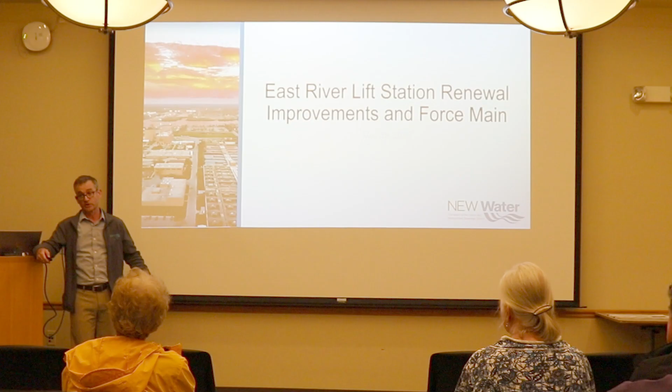Thank you for joining us at our public information meeting for the East River Lift Station Renewal Improvements and Force Main project. This is a project really important to New Water. I'm going to give you some background about who New Water is, for those of you unfamiliar, and then turn it over to people closer to the project who know more of the details. I'll do some introductions, give background on New Water, project overview, closing, and then we'll be around for questions about your property or what the construction activity might look like.

My name is Nathan Qualls, executive director at New Water. We have Lisa Saru and Max McGuire from our staff. Max is new to the organization. Lisa's been with New Water 11 years. I've been there about 16 years, it'll be 17 this year. We also have folks from Donohue and Associates who help us with the planning and design work for the project, and they'll give you some background on the project as well.

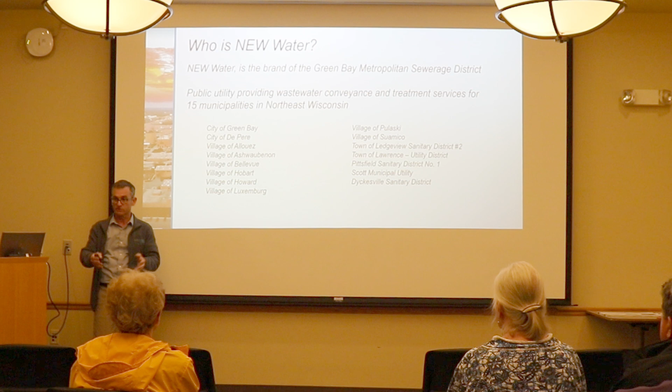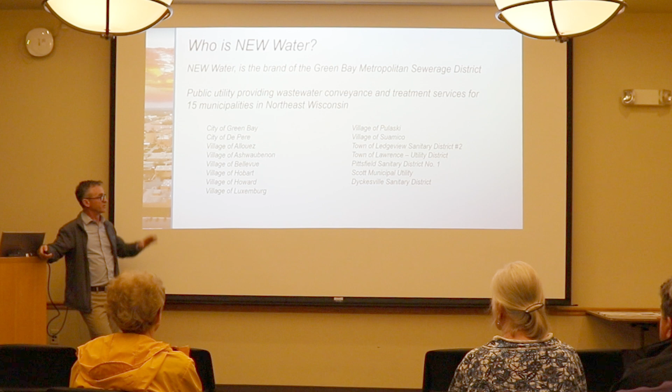For those not familiar, New Water is the brand of the Green Bay Metropolitan Sewerage District. We are the regional wastewater entity for the greater Northeast Wisconsin area. We serve the 15 municipalities on the list, including the city of De Pere as one of our customers. Direct homeowners aren't necessarily our customers, but the municipalities are. The city of Green Bay is our largest customer. We send out 15 bills each month, providing wastewater conveyance and treatment for those 15 municipalities.

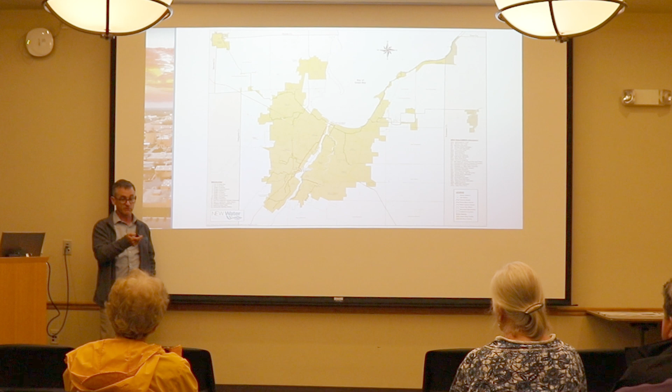It's hard to see the boundary, but along a line roughly here, the shaded area south of that line goes to the De Pere wastewater treatment facility, and the other shaded dark area goes to a treatment plant called the Green Bay facility, located at the mouth of the Fox River. Being city of De Pere residents, the wastewater from your home gets conveyed to and treated at the De Pere facility, located between Ashwaubomay Park and the Brown County Fairgrounds on the west side of the river. So now you know where your wastewater is treated.

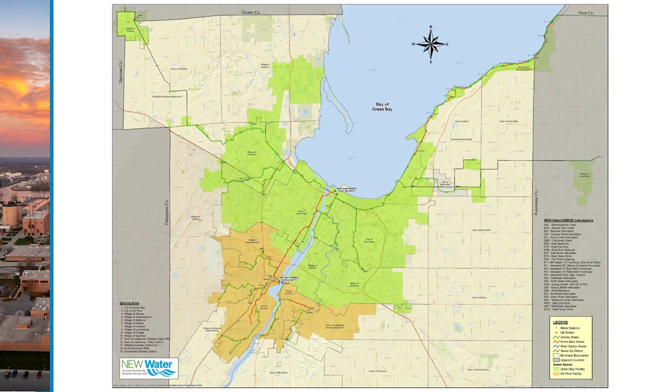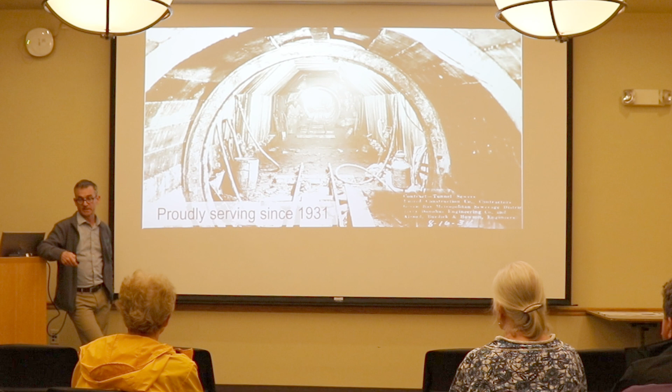This project is centered on the east side of De Pere, from our East River Lift Station, located by the East River—you'll hear more about that. That's our service area, and we've been an organization since 1931. It was formed during the Depression, as environmental impacts on the East River and the Fox River were occurring, and the Green Bay Metropolitan Sewerage District was formed to begin conveying and treating wastewater at our Green Bay facility. Our staff work around the clock, 24/7, 365, to provide those services for our customers.

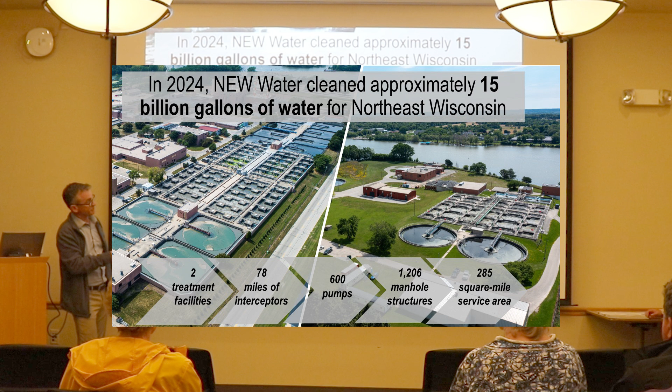We have two wastewater treatment facilities. The Green Bay facility is the larger of the two, treating about 33 million gallons per day, and the De Pere facility treats about 8 million gallons per day. This includes not just residents, but also businesses and larger industries in town, like the paper industry, which provides us a lot of wastewater as well. We own 78 miles of gravity sewers out in the collection system, so amongst the streets we do own some of those pipes.

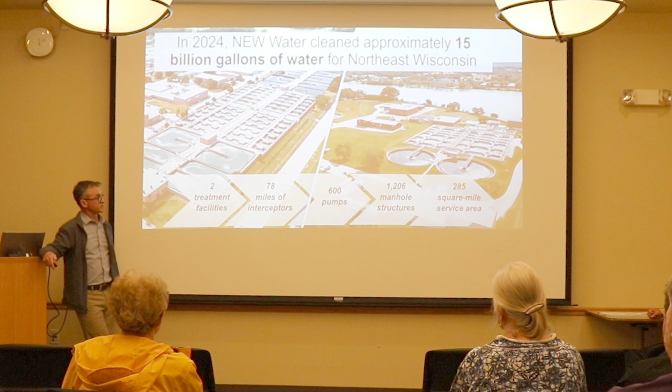We do this on behalf of the environment and our customers, with the goal of protecting our most valuable resource, water. This project is really important to help us continue to do that. We need to convey the wastewater from the east side of De Pere and from Ledgeview to the treatment plant so we can treat it and return it to the environment, meeting all of our permit requirements and protecting the environment.

I'm going to turn this over now to Brittany, who will walk you through the project specifics. Thanks, Nathan. I'm Brittany Hess, the project manager for this project. The focus of the project is broken down into a bunch of sub-areas. I'll go through all of those and then we can ask questions or have other conversations related to the project.

So we're getting into the specifics of the project overview section here.

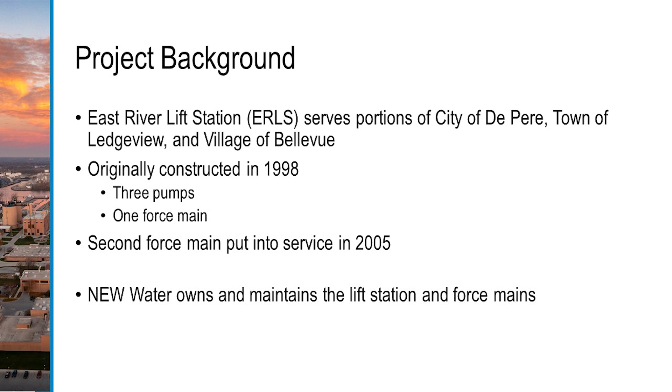Project background: the East River Lift Station, as Nathan mentioned, serves portions of De Pere, Ledgeview, and the village of Bellevue. It was originally constructed in 1998, with three pumps able to lift the wastewater and convey it to the treatment facility, and one force main. In 2005, a second force main was put into service. These are all part of New Water's assets that they own and maintain to provide wastewater conveyance services to all customers.

So this is more on the site of the project. Project need and cost: every time a project's been identified or there needs to be an upgrade, there's a bunch of factors that go into what makes this project elevated, needing to be designed and constructed. We'll go into some of those details here.

Age and condition becomes a big issue with these critical assets. The lift station needs to run at all times to maintain service to the residents and customers of the service area. Typically when engineers design assets like this, we give it about a 20-year useful life. There are ways to extend this through preventative maintenance and other activities, but this is generally the asset time frame we look at to provide continued level of service. As shown on the other slide, this lift station was put into service in 1998, so it's about time to look at renewal of those assets.

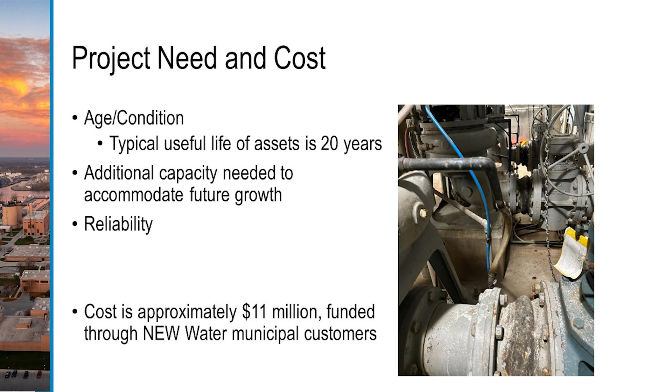We also are looking at adding additional capacity, which will be identified when I go through the project scope area, to provide for any future growth or development of this service area. We want to provide continued level of service at all times, and also reliability, since as a 24/7 operation, we want to provide continued service at all times. A few of those identified areas are what promoted this project to go through design and construction.

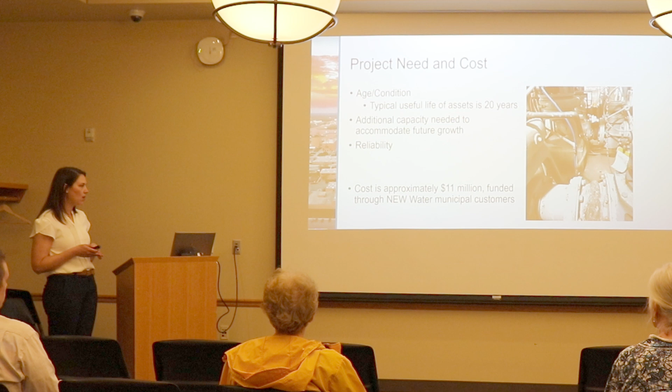Between the lift station and the force main, the combined construction estimate is about $11 million, and that is funded through New Water's municipal customers.

Project scope: this is more of the details of exactly what is being done. As we talked about, there are two separate construction packages. This is known as the East River Lift Station Renewal Project, which is the top portion of this slide, and then there's the force main contract.

Within the lift station, there will be replacing those three existing pumps that were identified, and also adding a fourth pump for capacity. That can provide additional service to customers for any future development, future growth, or anything related to the service area. There are some enhanced station reliabilities as well.

Backup emergency power through the form of a generator - during any power outages or power events, there will be backup emergency power. There are some building exterior and interior improvements, mainly related to the lift station building as well as exterior site improvements. I do have a plan sheet that you'll be able to see that on.

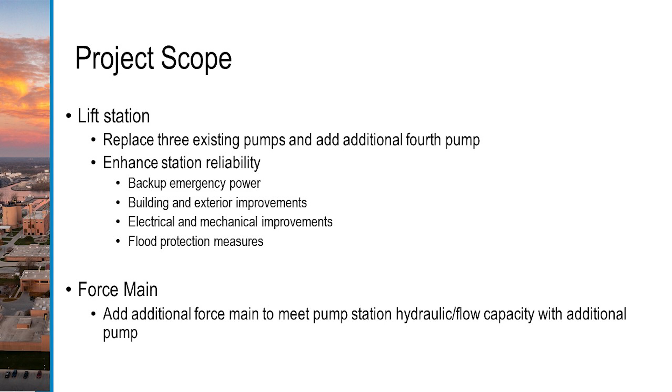There are some electrical and mechanical improvements, which will make it easier for operators to maintain the station and access different portions of it. Additionally, there's also flood protection - we are elevating some of the transformers outside of the flood protection level, and there's a picture that will show you why that's needed. So that is all within the scope of the lift station project.

Then we also have the force main portion of the project, which is adding an additional force main that will meet future hydraulic flow and capacity needs for the customers of the area. That will be broken into its own project, and the lift station will be a separate project.

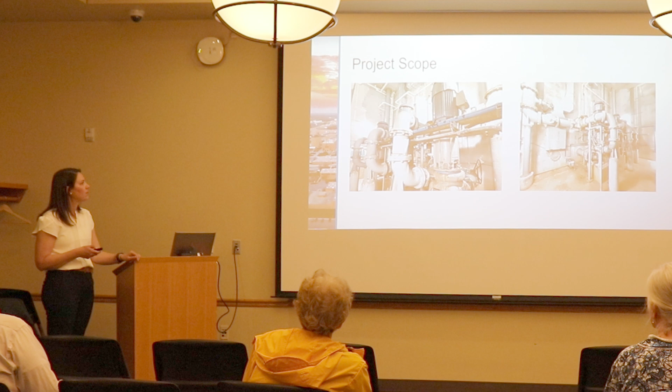A couple of these photos just show you what some of these assets look like. There's also a street view I can show you, but from the street as you're driving by, you may not even know what these brick buildings have down in them. They generally have a wet well, which is below grade, and then a surface level at grade where operators can access. This is the below grade level showing what the pumps look like. So you can see - I know how to work this pointer.

So here are these three existing pumps, and you can see the motors up here as well. This is a different view showing those three pipes, or three pumps. A fourth pump will be installed exactly in line with these, so that it can provide full service during both dry weather and wet weather events.

That's important because they're constantly providing service for day-to-day flow, every time anything comes from our house - toilets, laundry, anything like that. During wet weather flow, we also need to make sure rainwater can get into the system, so providing that full hydraulic capacity is important, which is also helped by that fourth pump addition.

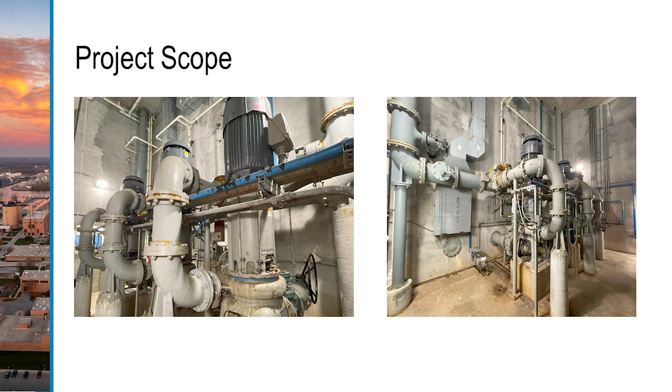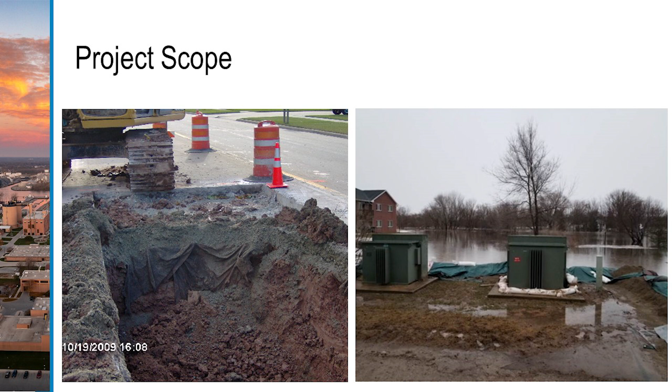For the force main contract, as you're looking at impacts and construction issues that might come into play, this is what a traditional trench looks like. The force main is below grade. You can see the pavement structure and substructure here, and then the contractor digs down to place the pipe in this area. This is about as wide as the construction disturbance would be in any given street during the force main contract.

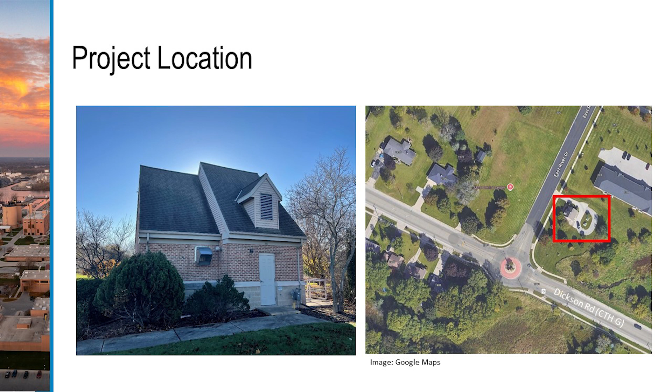So the project location - this is what I was referring to as the brick building here. The East River Lift Station is located on the corner of East River Drive and Dickinson Road. Here you can see that brick building shown on the left, and those are the existing transformers.

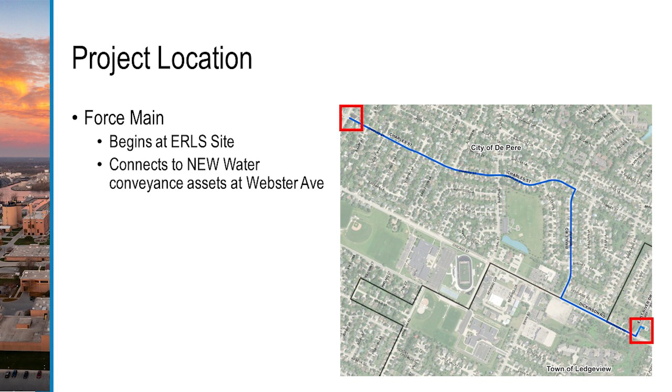The force main itself is just under about 8,000 linear feet being installed. It begins at this East River Lift Station location, at East River Drive and Dickinson. The alignment is shown in blue here - it goes down Dickinson, turns to Brule, then down Charles Street. Up here is Webster Avenue, so it connects into New Water's existing assets already in place there. This black line here is the municipal boundary between De Pere and Ledgeview.

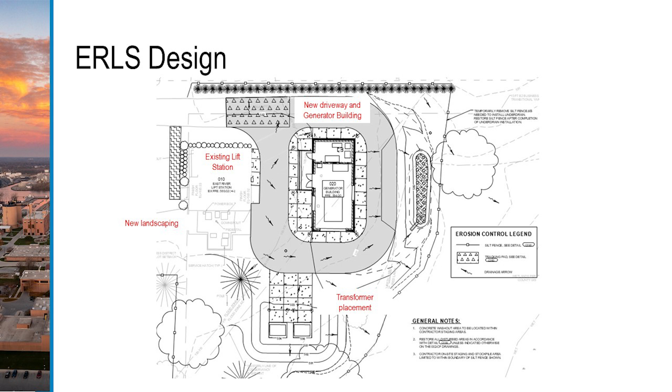This is a new generator building that will provide backup power and more reliability, as we discussed. There's some landscaping and green infrastructure. Here's that transformer placement, and these lines are grade lines for contour and topography. You can see we've elevated the transformer placement, depicted right here, along with new landscaping. So this is what future construction would look like in plan view.

So the construction of the force main is primarily in public right-of-way, which means it's either in the street or in that adjacent area from the sidewalk to the curb, known as a terrace. That's still generally public right-of-way. So that's the maximum area of disturbance that would occur at any portion of the installation of the force main.

This alignment has been reviewed through City of De Pere officials as well as Ledgeview officials. We've worked with them throughout the course of design. They've been involved and have seen the alignment. We've allowed space for any future improvements that they might have.

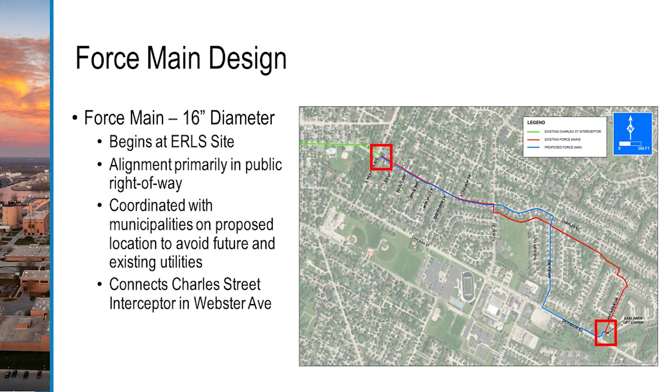So project impacts and schedule. A lot of this I've kind of already touched on, but we'll go through it in more detail. The construction, as I talked about, was mainly in the street or that public right-of-way, so that's the area from the sidewalk to the curb. The street is anything in the street from curb to curb base.

So the impacts that you will experience as a resident or business in this area is that there will likely be traffic impacts - lane closures, traffic rerouting, anything like that. That's all identified in the plan set, and that will give the contractor space and make it safe for you to be in that area as well. A lot of those are marked with signage and other things. I'm sure we've all seen traffic - summer in Wisconsin is when a lot of road construction gets done, so I'm sure we've all seen a lot of that around town lately going into the construction season.

There also will be some temporary driveway access restrictions. Particularly for some of the residents along Dickinson, they will experience a little bit longer temporary restrictions, because that's where the alignment is placed - it is closer to that curb line. So there will be some restrictions. The contractor will work with you, as well as we have that identified in the plan set, to try and minimize impacts as much as possible.

And then when you're along Charles Street and Brule Street, based on where the force main is in the street, it won't disturb your driveway, but there might be some restriction because they might be working right in front of your driveway at that given time. But there's lots of guidance and specifications that require the contractor to make notifications, and there's ways to have them know when your house is going to be impacted and when it won't be.

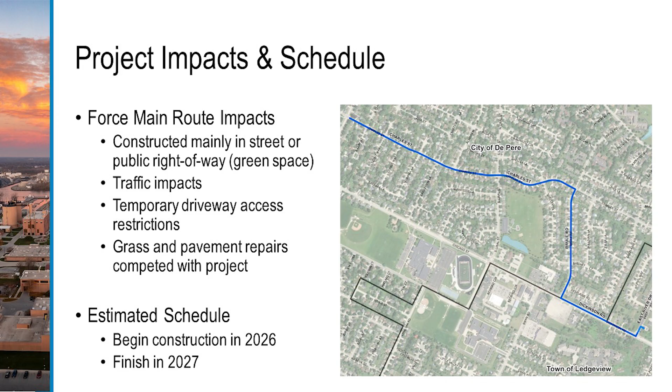Any grass and pavement repairs that are impacted by this project will be fixed and brought back up to existing conditions. The estimated schedule for this construction will begin in 2026, and we expect it to take about a year. You won't have full disturbance in front of your house for a year - as they slowly move along the force main route, there might be periods of disturbance and longer impacts for some, but eventually as they go through, the trench area will be repaved and restored to existing conditions or reseeded.

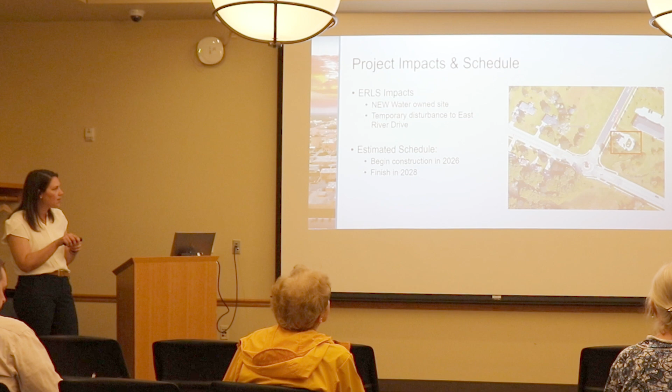So the East River Lift Station, because that's all contained on New Water's own site, provides less impacts to everyone. We are connecting - the proposed force main does come down East River Drive a bit, so there will be some minor disturbance if you take East River Drive to work or school or live near that area, or there actually is a dentist office here now. Google Maps is not up to date, but if you visit that dentist, you might have some minor impacts at some point. But the real areas of disturbance are all localized to that site, so it likely won't impact much of the public in that area.

Based on the estimated schedule, we anticipate it would start in 2026, and that has a longer construction time because there is more work, so that would be 2028 that we expect that to finish. That kind of wraps up everything that we have related to the project, so I can definitely help answer any questions.